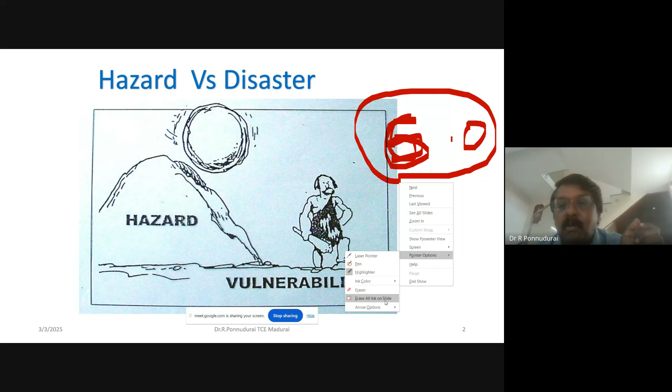In Chennai, it is a very crowded place, but the Rajasthan desert area won't be crowded. So the main difference is we are expected to lose more people at Chennai. So in Chennai, it is called a disaster. In Rajasthan, it is called a hazard. The same earthquake with a magnitude of 6 happening at Chennai and Rajasthan is given two different names. One is hazard and another one is disaster.

So now the Government of India has taken over. Earlier the agriculture ministry was giving relief measures only after a disaster. Now the MHA has taken over. The purpose of MHA in disaster mitigation is concentrating on, number one, mitigation measures, and number two, preparedness. They are pumping a lot of money into preparedness.

Suppose we take the same scenario: the stone is expected to fall from the hill over this person. Now if he is under a shelter, he is not expected to lose his life. These are called mitigation measures. At the same time, somebody can alert him so that he can escape, so his life will be saved. That is called preparedness. Nowadays, the Government of India is spending more money on mitigation and proper preparedness, and so is the case for this STP program.

If you see the relationship, what will the risk be here? Risk is hazard multiplied by vulnerability, minus capacity. Now, suppose we give a number for the falling of the stone from the hill, let us say 10. Only one person is standing here, so the risk will be 10. Now, to minimize the risk to 0, what needs to be done? Anyone can suggest. I want the risk to be zero. What should I do?

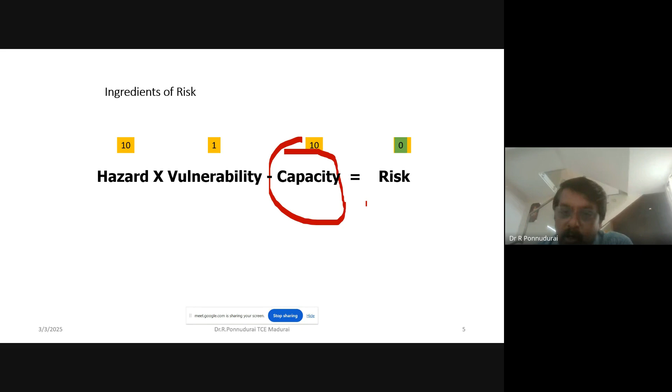Now we are aiming for increasing the capacity so that the risk is made to zero. That is our objective of this workshop.

When we say hazard, as I told, the natural hazard can be a landslide, earthquake, flood, cyclone, tsunami, whatever it may be, but it cannot be prevented. It is a natural phenomenon that is a threat to humans. The vulnerability is exposure to loss of life - more number of people, how many people are expected to lose their life. That's what we refer to as vulnerability here.

And the capacity - how to meet this hazard with available resources like men and material, with the potential resources. That's our capacity. So we need to increase the capacity and reduce the vulnerability, so that the risk can become zero. Our objective is to bring the risk to bare minimum by increasing the capacity or reducing the vulnerability. That is the aim of this particular program.

If you look at this disaster management chart, this is what happens when an incident occurs, maybe earthquake, tsunami, or cyclone. Immediately the government of India tries to spend money on response and rehabilitation measures, giving money for victims and spending on reconstruction and rehabilitation. But after that, the government of India is emphasizing more on prevention, mitigation, and preparedness. That is what we call capacity development.

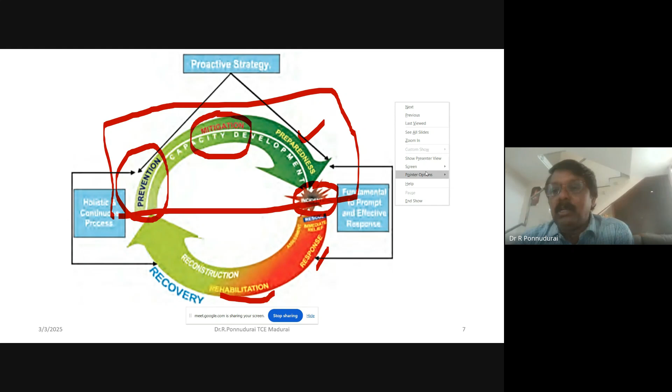More money is spent on mitigation, preparedness, and prevention. That is why we have to create awareness among people so that if preparedness is increased, we can minimize the risk. We can spend more money on mitigation measures like earthquake resistant design, cyclone resistant design, or tsunami resistant design. We have to go for resistant structures, resilient structures, and preventive measures. Guidelines can be given to society and people so that we can minimize the risk. These are all strategies we have to work out to minimize the risk.

If we look at this animation, that is the 2004 tsunami earthquake that happened at Sumatra. The waves which originated at Sumatra reached our seashore after almost 5 hours duration. The waves reached the eastern coast of India just 5 hours after the initiation of the wave propagation. This 5 hours is more than sufficient to vacate the people all along the seashore. But we failed to do it.

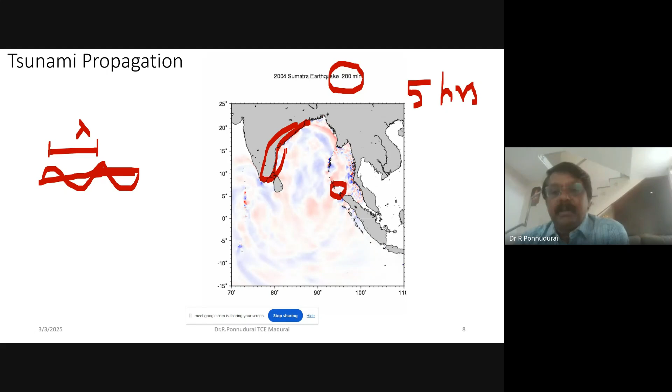Suppose you took a photo of the waves at that particular location - what is the amplitude and frequency of the wave? If you know that amplitude and frequency, it is possible to calculate how far these waves will reach, what intensity the wave is carrying, how much energy is carried, and how far it can reach. Even then, we could not save the people because of the lack of preparedness and awareness. That is why the government of India is spending more on creating awareness. Nowadays we have floating bodies everywhere in the Indian Ocean, which will give indication about the tsunami. That is the importance of preparedness.

The seismic risk directly depends upon the hazard and vulnerability here. If you see this, seismic risk directly depends upon the hazard and vulnerability, or the exposure of the element at risk. So it can be minimized if you reduce the vulnerability. If it is put to a small circle, then the risk will be reduced. In case the vulnerability is reduced, risk is also reduced. We cannot have control over the hazard. That is the objective now.

So we look at this table.

So that's the global occurrence of earthquakes. More than 8 on the Richter scale, almost only one such event is expected to happen throughout the world. Between 7 to 8, almost 18 numbers of earthquakes are expected to happen. Between 6 to 7, it's almost 120.

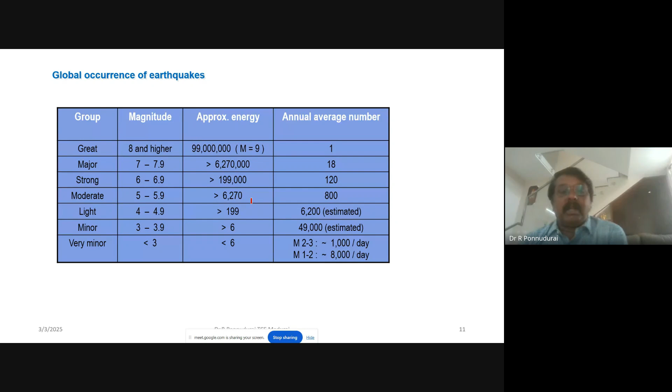We happen to see the energy released during each earthquake, given in this particular column. If you compare, 199,000 divided by 6270 is approximately 30. Same way, 6270 divided by 199 is approximately 30. So increasing one number in the Richter scale results in almost 30 times the damage. The extent of damage will be almost 30 times because the energy release is almost 30 times. So we cannot say it is only a one number increase in the Richter scale magnitude.

So even now, earthquakes are happening, the shaking of the ground is happening. Only thing is we are not able to perceive it when it's less than 3, approximately.

Okay, this one more table. If you look at this table, only one down south of Tamil Nadu we have Coimbatore here, that is 1900, an earthquake with magnitude 6, and reported deaths almost nil. Rest of the areas, if you see, these are all Assam, Kangra, Nepal, Assam again, Anjar, Bihar, Nepal, Uttarkashi, Killari, and Chamoli. That is up to the 2001 record.

So what does it actually indicate? Why are only these northeastern segments of the areas affected by earthquakes? Anyone? Can you give any hints?

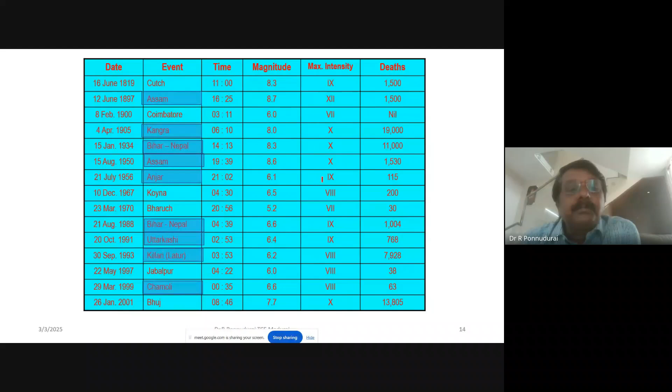So Assam, Bihar, again Assam, Anjar, Nepal, Uttarkashi, Killari - these are all regions of the northeast. Why are earthquakes frequently happening in those regions? Sir, it might be because of tectonic plates movement.

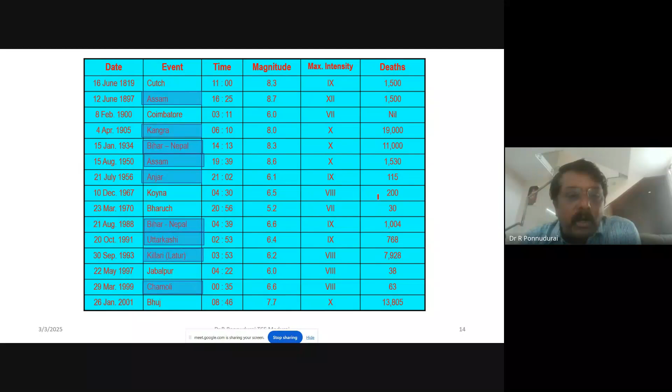Very good, very good. I will let you know about the tectonic plates, what that actually is. Maybe it is correct, actually, because of the tectonic plates - what we understand from that, we will see. Exactly correct. We have two plates, the Indo-Australian plate and the Eurasian plate, that are expected to collide at the Himalayan belt, the northeastern center. It's very correct. So these are all the contents I wanted to discuss with you.

So, number one, what are the causes of earthquake? Before that, suppose you have two water tanks kept at the same level, and the tanks are filled with water.

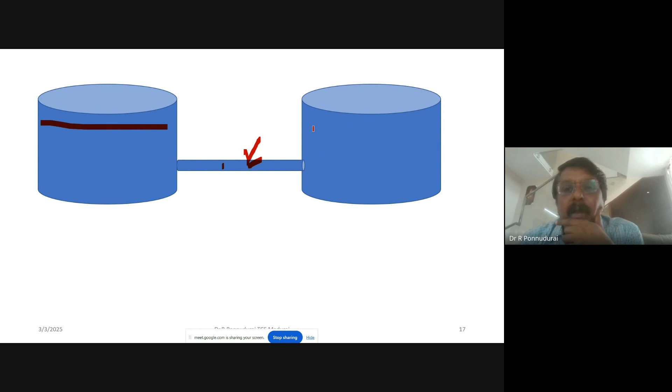Now if I connect a pipeline in between, is there any water flow expected in the pipeline? Both tanks are having filled water - is there any flow of water in the pipeline? Because if the water is filled in both tanks, will there be any flow of water? No, there won't be any flow, sir.

So if the same water tanks are kept at different levels, now the water flows from the higher level to the lower level. Do you agree or not? Yes, sir. So the flow of water took place because of the difference in head.

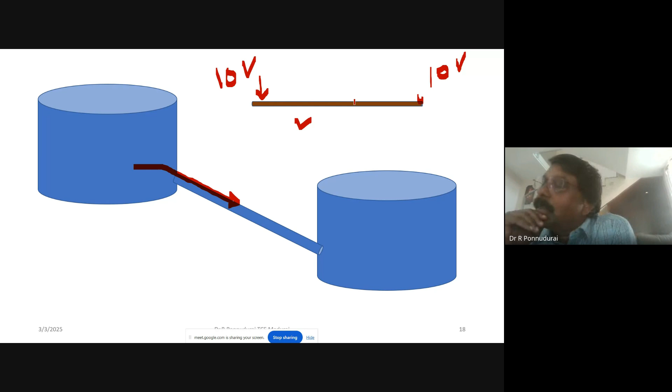Same if you take a piece of wire - if I give a potential here, 10 volts, suppose, and 10 volts here, and here also 10 volts, will there be any flow of current in the wire? No, sir, it will remain the same because the potential difference is 0 - 10 minus 10 is 0. Suppose instead of 10, if I go for 100 now - 100 minus 10 - now the potential difference will be 90. So current is expected to flow in the piece of wire. Is it clear? So when the voltage increases, potential difference increases, current flow takes place.

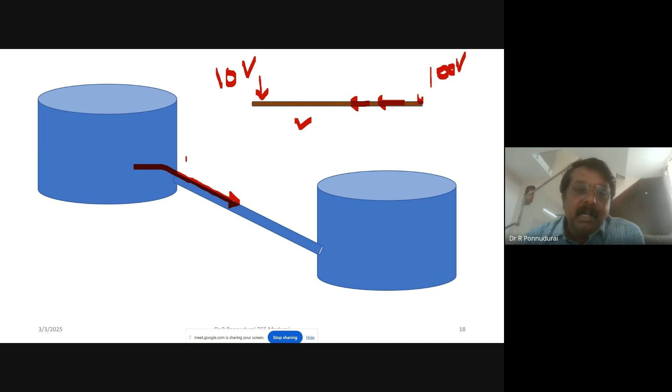Same way here, when the head increases, the water flows. Similarly, during the formation of earth, what happened is the high density particles got deposited at the core - that is what we call the core. High density particles got deposited at the core, while lightweight particles rose to the surface - that we call the crust.

Now, if you compare the pressure, temperature, and density between the core and the crust, the pressure will be maximum at the core. Will you agree with me? Temperature also will be maximum at the core, and density also will be maximum. Here at the crust, it will be less.

Because of the difference in pressure, temperature, and density between the core and crust, there is a formation of current which flows in the mantle region. That current makes the mantle move. So that means the mantle is semi-solid in nature and keeps on moving.

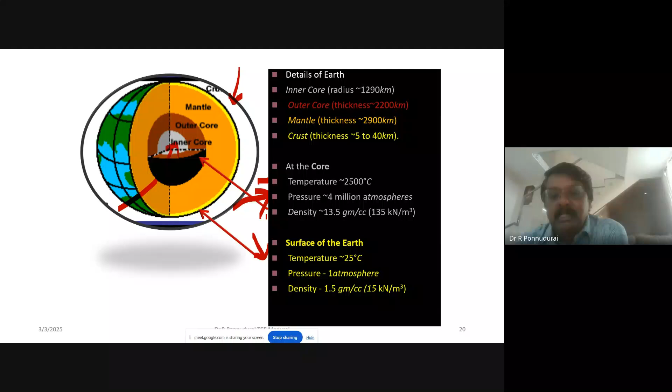So we have the core and the crust. At the core, the temperature is 2500 degrees centigrade, but at the surface it is only 25 degrees centigrade, maximum 40 degrees centigrade. Same way, the pressure at the core will be almost 4 million atmospheres, but at the surface it is only 1 atmosphere, 1 kg per centimeter square. Same with density, it is going to be 13.5 gram per cc at the core, here it is only 1.5 gram per cc.

So because of the difference in temperature, pressure, and density between the core and crust, there forms a current. This is what we call a convection current. The convection current makes the mantle move, so the mantle keeps on moving. It is like an egg, we can visualize it like an egg.

So the inner core is the yellow portion, and this white portion is the mantle, suppose let us assume that. This is what we say is the shell, we can resemble it to the crust. Likewise, the skull is made up of a number of patches, like our human skull, it is like patches.

Same way, the earth also has 7 major plates which are floating over the mantle material. So when the plates are floating in the mantle, it is expected to make a collision. The plates are moving because the mantle is moving. The mantle is moving because the current is developed, which is due to the differential temperature, pressure, and density differences between the core and crust.

Is it okay now? How come the plates are moving? The plates are moving because the mantle underneath the plate is also moving. The mantle is moving because of the current developed, which is due to the differential temperature, pressure, and density between the core and crust.

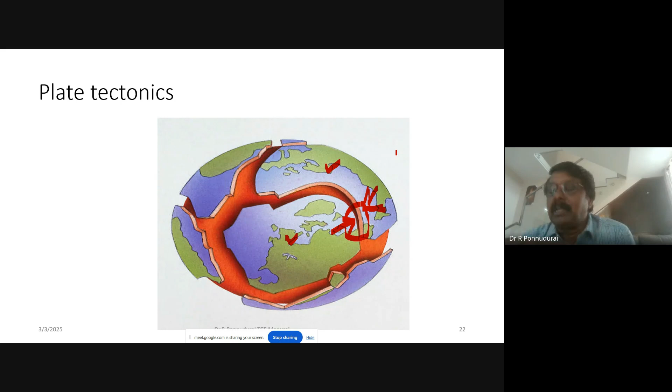That's what we say is plate tectonics. So these are the plates: Eurasian plate, Indo-Australian plate, Pacific plate, North American plate, South American plate, and African plate. If you happen to see this portion, this is our India. So India is in the Indo-Australian plate.

What happened is the Indo-Australian plate and the Eurasian plate are expected to collide at this particular region, and that is why the formation of Himalaya. So the Indo-Australian plate and the Eurasian plate moved one over another, and that resulted in the creation of the Himalaya. The Himalaya formation took place because of the movement of these two plates.

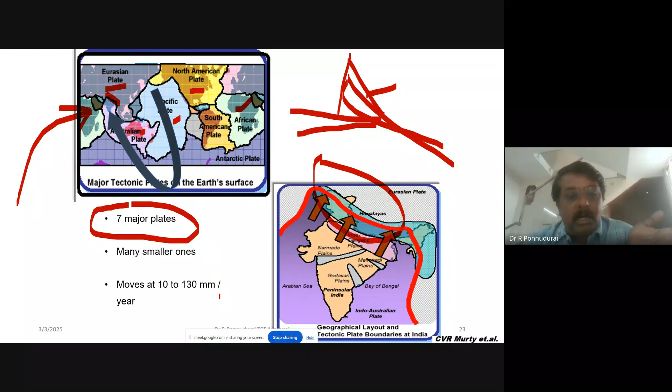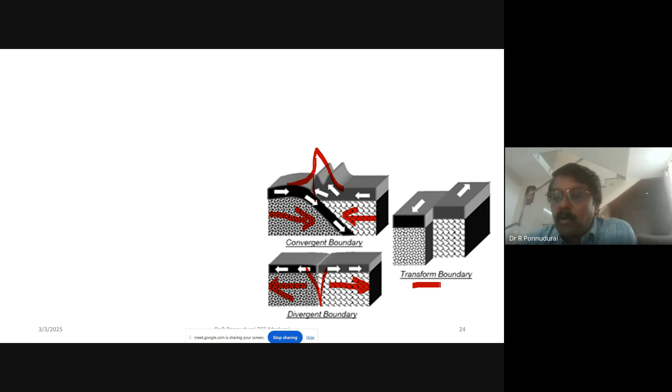So this is what happens actually. When the plates are moving close to each other, we call it a convergent boundary, so hill formation is expected to develop. When the plates are moving away from each other, that is called a divergent boundary, so here we are expected to develop a valley formation. Okay? And this is called the transform boundary, a shearing action. So these plates are expected to move only under these three conditions.

Okay? So this is the number one reason, that is plate tectonic theory. Number two, any disturbance happening underneath the earth crust is also possible. That is one more reason. Suppose you have a number of layers of rock: we have the granite, here limestone. Likewise, we have a number of layers of rock, and each layer of rock will have a different elastic modulus. Suppose you have a building constructed over this particular region; it is very confined.

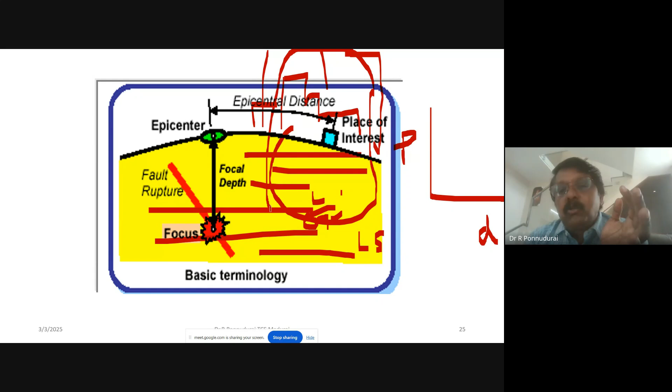In this case, if you plot the load versus deformation graph, this is the entire load. Suppose this is weak rock, that is the limestone, and these are granite, heavy weight particles. We plot the load P on the y-axis, and the elastic modulus of this particular rock layer, the limestone, is very less. So in this case it is going to be vulnerable, and this limestone rock is expected to get broken.

In that case, all along the fault it is going to slide, that movement of that particular rock layer. Suppose the rupture of rock takes place: underneath the earth crust, at a weaker portion, the point where the rupture of rock takes place is called the focus point. Now if you plot P versus delta up to the rupture of rock, before rupture the plates are expected to move, that is delta. So the area under the graph multiplied by the volume of the material just above the focus point will give the amount of energy released during earthquake.

The amount of energy released during earthquake is the area under the graph multiplied by the volume of the material just above the focus point. That much energy is expected to be released at the focus point, and on release, waves are created. Any vibration underneath the earth crust causes wave propagation, the initiation of a wave. Those waves we call body waves, that is the primary wave and the secondary wave.

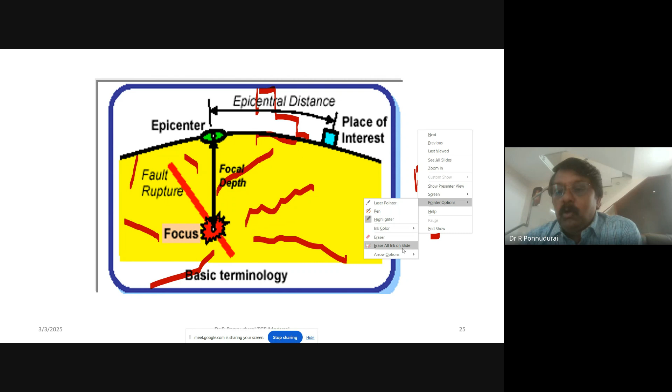When the waves reach the crust at the surface and propagate underneath the structure, they make the structures move in to and fro motion and up and down motion. That's where the problem comes. So this is the second reason: any rupture underneath the earth crust is also a reason for the earthquake. Number one is plate tectonics, number two is any disturbance underneath the earth crust. The rupture takes place at the point we call the focus, and where the waves come out at the surface just above the focus point, that point we call the epicenter.

Is it clear now? So far we discussed only two things. Number one is causes of earthquake, and there are two reasons: number one is movement of the tectonic plates, number two is rupture of rock underneath the earth crust. When the rupture of rock takes place, the waves are initiated. Any vibration in a solid medium induces a wave. When the waves come out of the surface at the epicenter, the surface waves are generated.

Okay, these waves which are originated at a focus point we call the body waves. Body waves, that is primary wave and secondary wave. So when the primary wave and the secondary wave propagate underneath your structure, it's not expected to damage the structure fully. But when the primary wave comes out of the surface at the epicenter, it makes the structures move in a to and fro motion, up and down motion. That wave we call a surface wave. The surface waves are more dangerous than body waves.

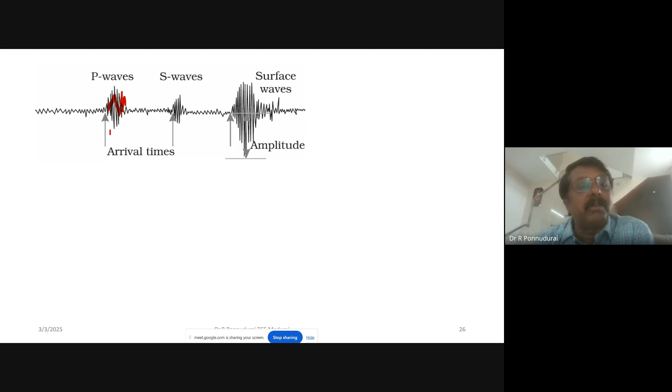Okay. So this is what happens in the seismograph when the waves are arriving. The first disturbance we can witness in the seismograph indicates arrival of P waves. The second disturbance indicates arrival of S waves. So from that it is possible to calculate the magnitude of earthquake. You will see that. So this is the focus point where the rupture took place. This is what we mean by the delta here.

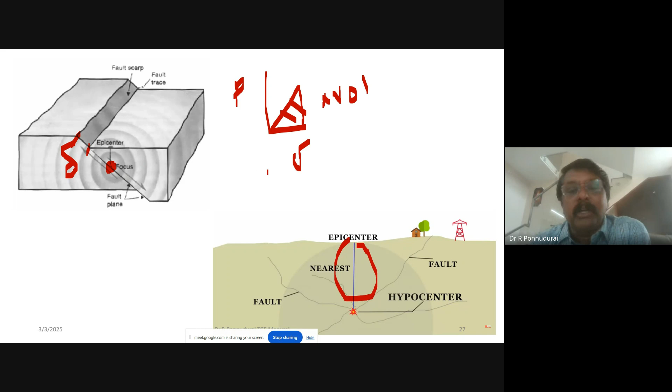So when we plot the graph of P versus delta, the area under the curve multiplied by volume of the material just above the focus point will give the amount of energy released during earthquake. That energy we express as a number like the Richter scale magnitude. So we can visualize the delta and the surface also. It is not every time you can see that.

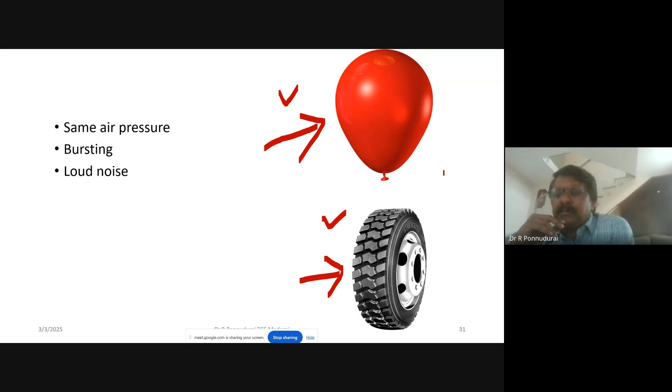So if you happen to see these two objects, here we have the balloon, here we have the lorry tire. We are filling the balloon with some amount of air pressure. The same amount of air pressure is filled in the lorry tire also. So when the bursting takes place, which is expected to make a louder noise? Can anyone suggest? Both are filled with the same amount of air pressure, the balloon and the lorry tire. Tire, obviously. Tire. Why? Why tire?

It can hold more pressure than the balloon. Okay. It can hold more pressure. But here my condition is I am applying an equal amount of air pressure. Then it will be, sir, balloon only. But obviously we could hear louder noise when the bursting of the lorry tire takes place, isn't it? But the balloon can't hold the same pressure as the tire. So in this case, first the balloon will burst rather than the tire, because the tire has thick walls which can hold more than the balloon. Okay. So another interpretation.

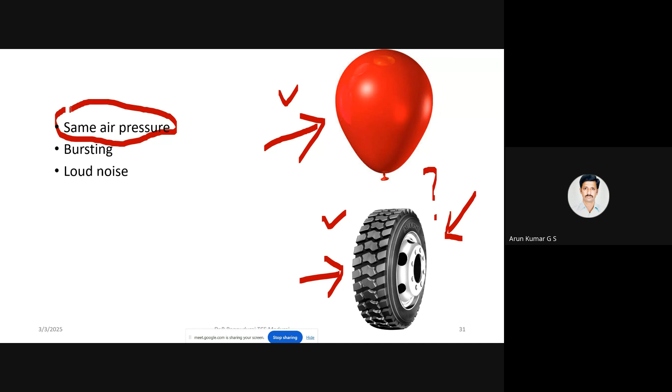So here we can plot the graph of load versus deformation for both the balloon and the tire. If we plot it, it will be like this for the balloon; it is going to deform more. In the same graph, in case of tire, it will be like this. If we calculate the area under the curve for both cases, multiplied by volume of the material, that is the balloon here and the lorry tire here, which will have more energy?

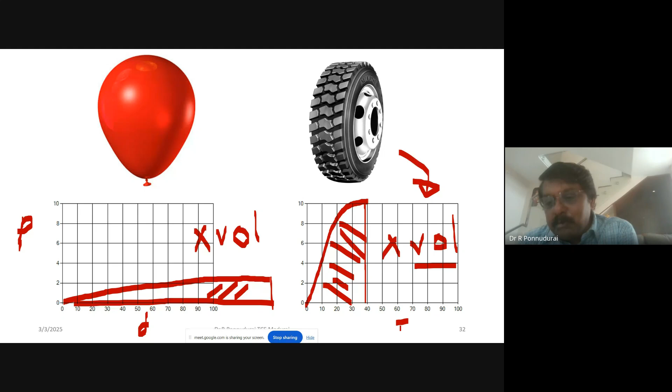Area under the curve multiplied by volume of the balloon. Volume of the balloon means the thickness multiplied by surface area. The same way here, the volume will be more for the tire. The area under the curve may be less or more than that of the balloon, but the volume is going to be more. So that means the energy absorbed in the tire will be more than that of the balloon. Do you agree or not?

The amount of energy absorbed is going to be released in the form of sound energy. So that is why the tire makes louder noise when it bursts. Is it clear? Yes, sir. Same way, in case the rupture of rock takes place underneath the earth crust, somewhere here, this much energy is expected to be released. If you plot load versus deformation, the area under the graph multiplied by volume of the material just above the focus point is going to be released. That amount of energy we call the Richter magnitude of earthquake.

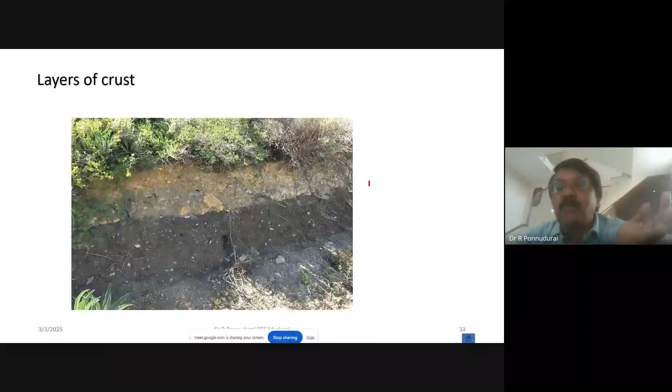Number one is movement of the tectonic plates. Number two is any disturbance that happens underneath the earth's crust. So this is a brief introduction to the cause of earthquakes. When the earthquake happens, these waves are created. These waves we call primary waves, originated at the focus point.

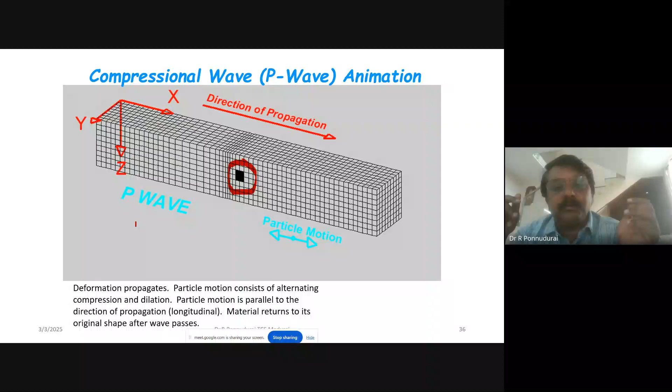So this is the primary wave. Look at the black dot. This is what happens in the soil: it is getting compressed and elongated. If you look at the soil sample at a particular location, the soil is expected to get compressed and elongated. This is what is going to happen in the building also. So this is regarding the primary waves.

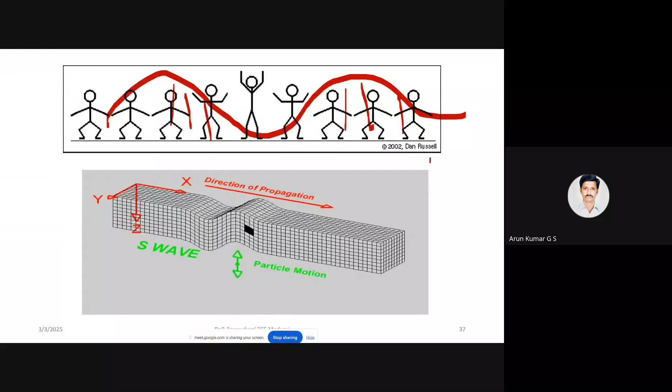Okay. Can you see now? Yes, sir. Okay. So which wave is this one? Is it a primary wave or S wave? Yes, right, sir. S wave.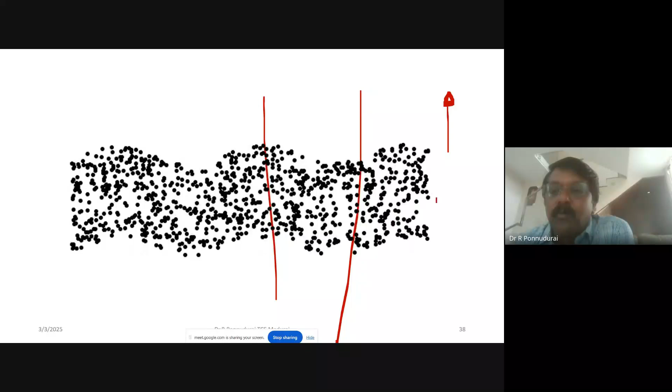If you draw a line here, each and every particle will be vibrating in its own plane. It is not going to divert from its original plane. If you take any line, all the particles are vibrating in the same plane. That's the main phenomenon of the S wave. When the S wave propagates, each particle vibrates in the vertical plane, so our building is expected to move up and down. When the building goes upward, there is no problem because we have given a factor of safety, so the building is safe in up and down motion. But when the building is moving in to-and-fro motion, that's where the problem comes.

Just imagine the S wave propagation in the soil sample. One diagonal is getting increased, the other diagonal is getting compressed. That is shear wave propagation. Now both the primary wave and the secondary wave originate at the focus point. The primary wave travels faster than the secondary wave. When both waves come out to the surface at the epicenter, surface waves are generated, and when they propagate underneath the structure they cause the problem. So these are the surface waves.

We call it a Rayleigh wave. Just look at the dot. It is moving in an elliptical fashion. Your building is also going to move in an elliptical fashion when the surface waves are propagating. This is the problem. When it is moving up and down, there won't be much problem. When the building is expected to move like sea waves, in an elliptical fashion, there the problem comes. That is why the surface waves are more dangerous. That happens only at the epicenter. At the epicenter, when the waves are initiated, the surface waves are generated.

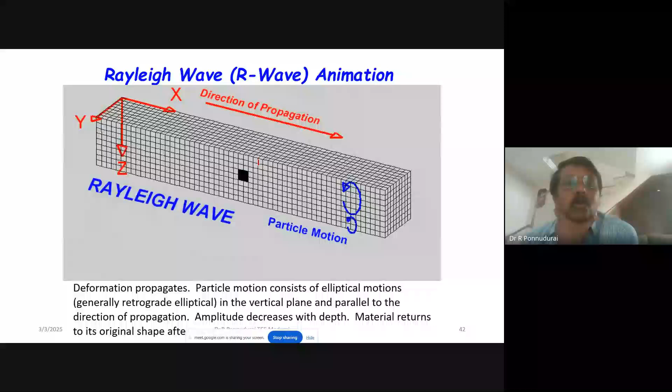These surface waves are, number one, the Rayleigh waves, and number two, the Love waves. Both waves are expected to originate at the epicenter. The Love wave is nothing but the S wave, but in the original plane. It is like a snake movement. These Love waves and Rayleigh waves are more dangerous than the primary waves and the secondary waves. So we should be able to tackle these Love waves and Rayleigh waves to safeguard the structure. Okay.

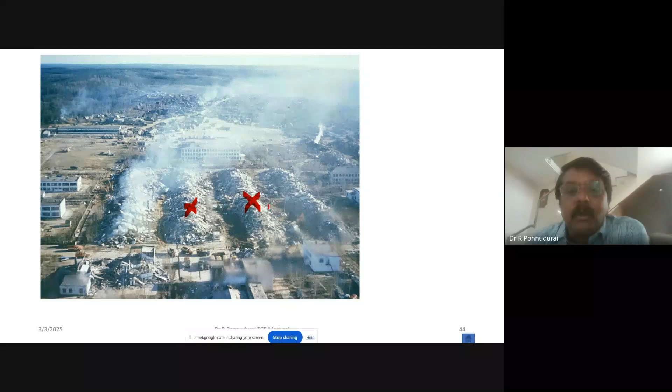Now look at this picture. These are all the buildings completely collapsed, but these buildings are okay. This building is also okay. So what may be the reason? It is in the same soil. Why are these buildings okay? Why did these buildings collapse?

So suppose this is our map here. We are at Chennai. Some epicenter is available, let us take between Chennai and Coimbatore. So this is the epicenter. This is the location of the building. If you orient the building in this direction, the building will be safe. If you orient the building in this way, it is going to be dangerous. Why?

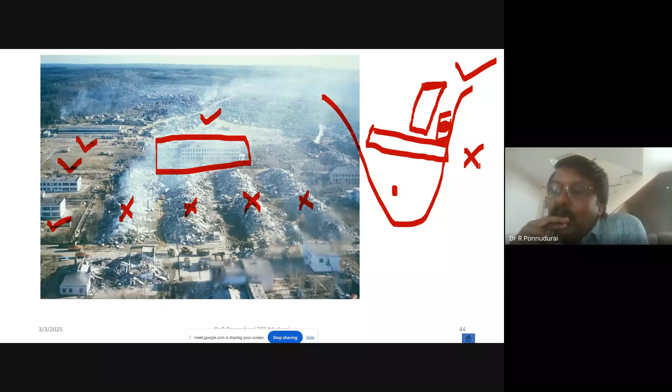So this is the epicenter location. You orient the building in this direction, it's okay. When we orient the building in this direction, perpendicular to the wave propagation, it is going to be very dangerous. Why? Suppose you look at this rectangle: this is D, this will be B. So the moment of inertia of this portion will be B D cube divided by 12. The D will be parallel to the wave propagation. So wherever the force and the dimension are parallel, that will be D in the moment of inertia.

If we calculate the moment of inertia for this rectangular building, and the same way for this building, this will become D and this will become B. So the moment of inertia will be less here, and here the moment of inertia will be more. Moment of inertia is directly proportional to K, that is the stiffness of the building. So here the stiffness K is more, and here K is less.

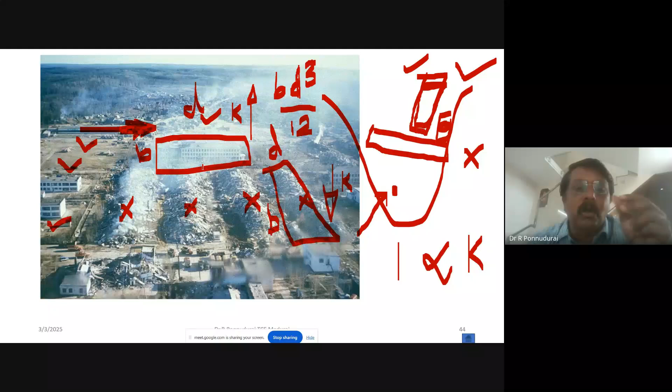Is it clear now? That means you have to orient the building in the direction of the wave propagation. For that you have to look at where the epicenter is and where you are going to construct your building. If both points are known to you, you can orient the building in this direction. That is the number one point. So we can safeguard the building from earthquake collapse. So the orientation of the building matters.

These are all the same type of building, but these buildings are safe because of this orientation. The wave propagation had taken place in this direction. Is it clear now? Shall I go to the next point?

Okay. Yes, sir. Now, so far we have seen the causes, the waves and the orientation of the building. Measurement of earthquake, I will not get into the details. There are two measurements: one is a quantitative measurement, and another one is a qualitative measurement. That we call magnitude; here we call it intensity.

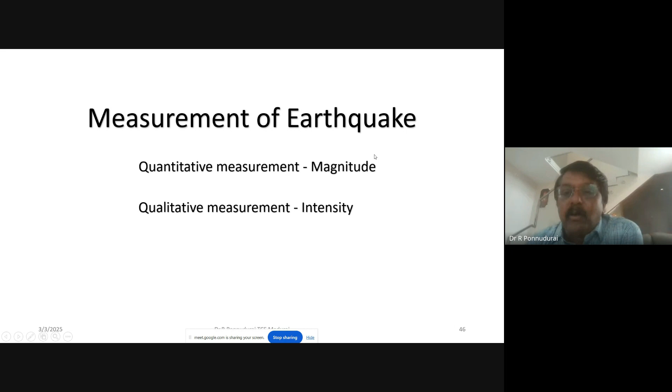In the case of a cube, if we see M30 grade of concrete, that indicates 30 Newton per mm square. That we say is in quantity, magnitude. If we say in quality, it is a good concrete, a poor concrete, moderate concrete. That's why we call it a qualitative measurement. Same with earthquakes, we say it in numbers because it's the magnitude. Energy released during an earthquake is termed in the form of a number, so we say it's magnitude.

If we measure the earthquake by merely observing the extent of damage, that we call intensity: good, bad, or worst merely based on observation. Suppose there is a huge crack in the wall, a huge crack in the beam, a huge crack in the column. Merely based on observation, if we classify the earthquake, we say it's intensity. Magnitude can be calculated using the Richter scale, that is by using a seismogram. We will see how earthquakes are expected to.

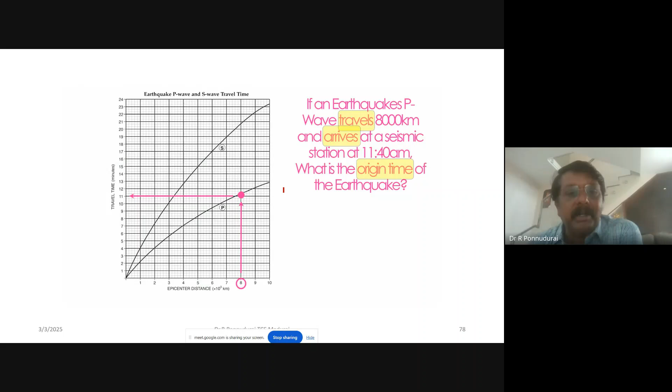Actually, I want to discuss so many things, but the time is not there. Go fast.

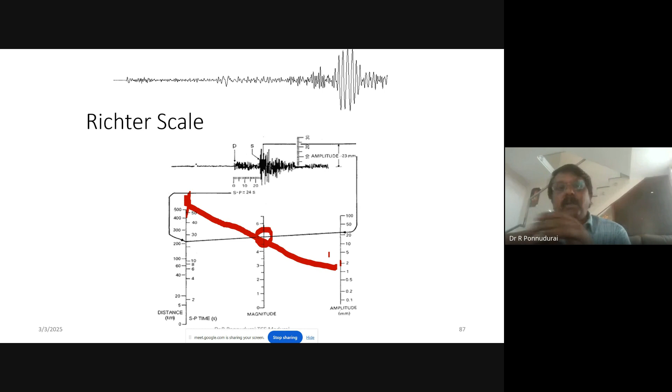Suppose you are measuring the same earthquake from Japan, what happens? The S-P time difference will be somewhere here, and the amplitude of the secondary wave will be somewhere here, but the magnitude is not going to change. It is going to pass the same magnitude, 5. That is why the Richter scale magnitude is universally accepted. Is it clear now? The number indicates the amount of energy released during the earthquake.

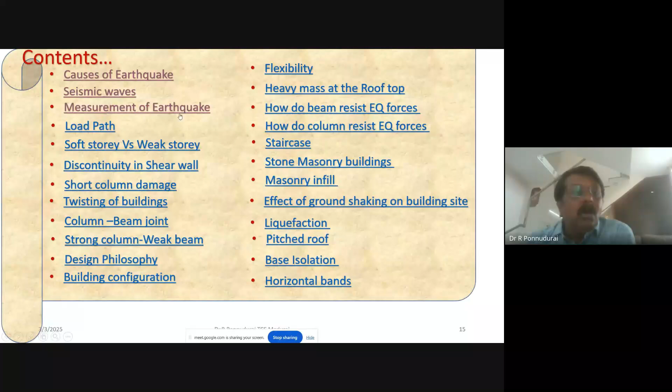Now the important topic: load path. We know that in a building, the load is transferred through the elements of the building, that is, from slab to beam, beam to column, column to the foundation, foundation to soil. So in case this is the building, from the slab it goes to the beam, from beam to the column, from column to the foundation, and from foundation to the soil. That is the load path we conventionally design for.

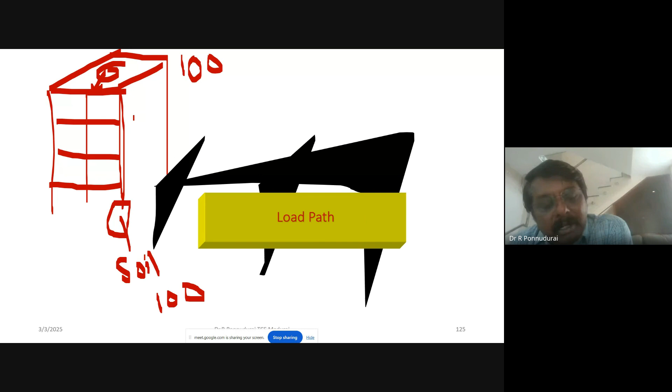So whatever loads are available, let us take 100 units of load at the top. The soil also will have to have the same 100 units of load. The load transfer should happen. No element in the building, whether it is a beam, a slab or a column, should hold the load; it should transfer the load to the other element. So from slab to beam, beam to column, column to the foundation, foundation to the soil. Our design should ensure that whatever external loads are available are transferred to the soil without any dissipation. That is the objective of the design.

But here a problem comes. What is the problem? We will see that. In the case of load path, let us imagine. When the wave propagates under the structure, the building is expected to move in up and down motion and to and fro motion also. Both ways are possible.

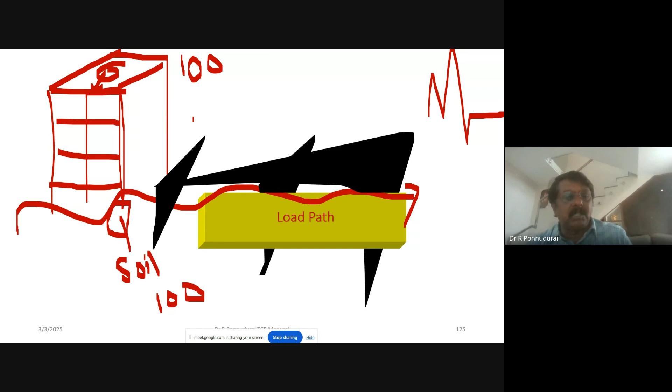When it moves up and down, damage occurs, but it's not going to be very much damage. But when the buildings move in to and fro motion, we are going to have a force called inertia force, which is expected to act.

So let us imagine there is a building here. When the wave propagates under the structure, your foundation, which is connected to the soil, also goes in the direction of the wave, but your upper storey is not going to cooperate with your foundation. It is going to experience a force in the opposite direction. Let us assume that I am standing in the bus.

Okay, so all of a sudden the driver starts the bus. My feet, which are touching the floor of the bus, go along with the bus, but my upper body is going to experience a force in the opposite direction. This is what happens when the bus moves in the forward direction. I am standing in the bus, and my upper body experiences a force in the opposite direction. That force depends upon the mass of my body and the acceleration of the bus. So this force, mass multiplied by acceleration, is a force which pushes me backward.

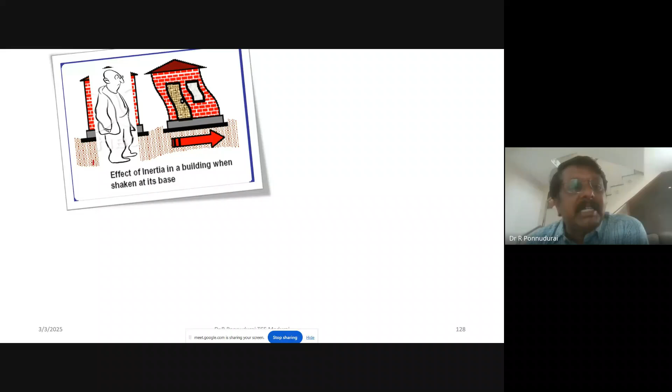Now just replace me with the building. I am standing in the bus, my feet touching the floor go along with the bus, but my upper body experiences a force in the opposite direction. That force will be mass times acceleration. If I have more mass at the upper body, I receive more force; if less mass, I receive less force. The same thing happens in the building also - that force pushes the building in the opposite direction.

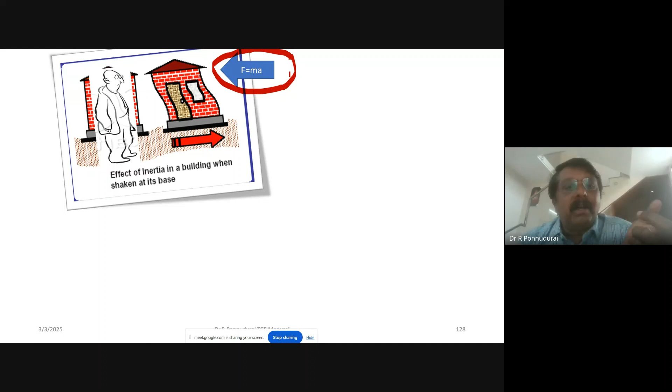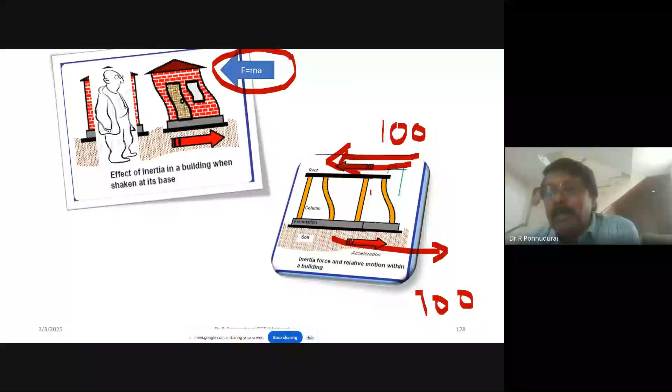Not only that, the force available at the roof level cannot be transferred to the soil without any dissipation. Suppose the same 100 units of force available at the roof level cannot reach the soil as 100 units - unlike in the case of live load and dead load. That is the main reason for the collapse of buildings. Whatever force is generated at the roof level has to be transferred to the soil without any dissipation. So we will see what potential deficiencies exist in our buildings.

Number one: we don't consider the information regarding the inertia force in our design.

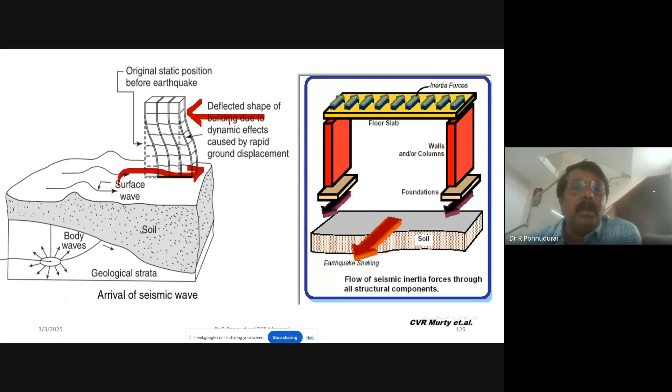So this is what happens when ground waves propagate under the structure - the foundation moves, but the upper story experiences a force in the opposite direction. That force is not being able to transfer to the soil. So this is a force - say 100 units of force at the roof level - that is the inertia force. The frictional forces should be such that the same amount, 100 units of force, should be available here. So here it's 50, here it should be 50. In such cases, it is possible to transfer the load - you have to just account for these frictional forces, which should be equal to the developed force. Then it is possible.

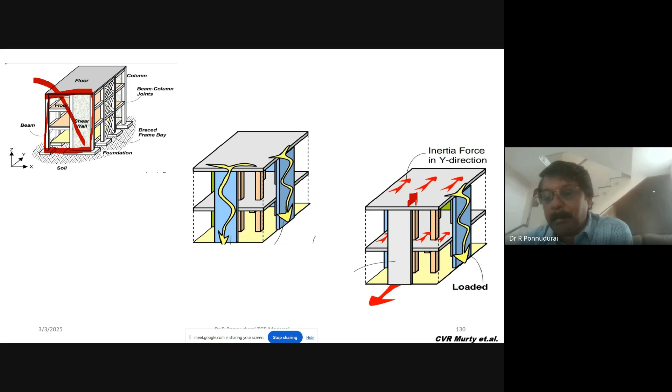This force can also be transferred through a shear wall - we can provide an RC wall. Via this wall, it is possible to transfer the external force. So both ways it is possible to transfer the horizontal force. These are the provisions: number one is the moment resisting frame, ordinary moment resisting frame; this is the braced frame bay, that is with the shear wall. With these provisions, it is possible to transfer the horizontal force.

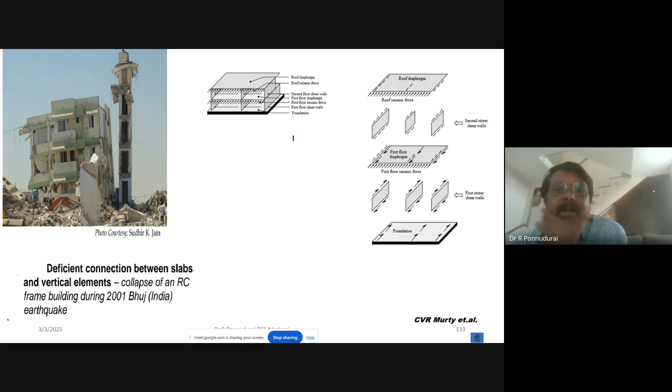So the transfer load path is very important. Whatever force is expected to generate at the roof level has to be transferred to the soil without any dissipation. If you are able to do this, the building will be safe.

That is what regarding the load path. Now let's look at soft story and weak story failures in earthquake-resistant buildings. This is our conventional building in urban areas - we have car parking at the ground floor, so we construct the building with an open story at the ground floor for our convenience. When we have such a building, earthquake forces are expected to act at each and every floor, acting horizontally. It is like a cantilever beam, an inverted cantilever beam, with a number of point loads.

So if you draw a shear force diagram for this beam, suppose let us take 2, 3, 5. How can you draw the shear force diagram? It will be 2, so it will be 5, it will be 5 plus 5, 10. So this is what the shear force diagram looks like for this cantilever beam.

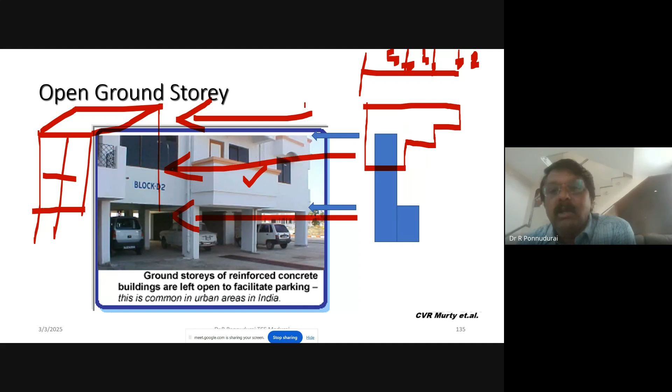So here also this is a case of inverted cantilever. The building is fixed at the bottom here. The forces are expected to act horizontally, so the building behaves like an inverted cantilever. The shear is expected to get accumulated at the bottom. More shear accumulation is expected to happen at the bottom.

But we don't have any shear resistance at the bottom. More shear is expected to develop at the ground floor, but there is no resistance to shear at the bottom. That is why the building is expected to get sheared off at the ground floor, and the building will be falling down. So we should avoid the open ground story.

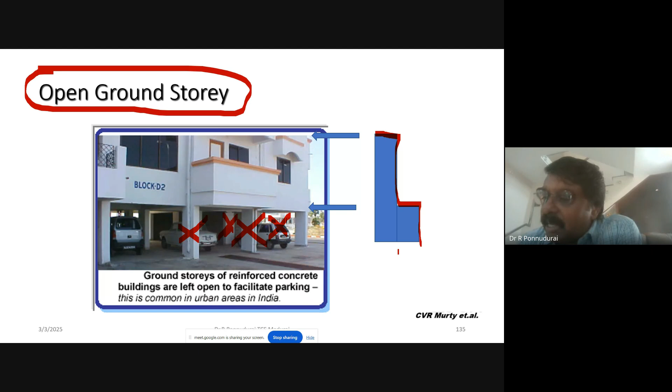So before that, what is that actual shear force here? Can anyone say what the shear force would be? What is that shear which is expected to damage the ground floor? What is it actually, shear? So suppose if you look at the broomstick, okay.

I am cutting the broomstick with scissors. I'm giving a condition: you have to apply equal and opposite forces. Here also 5 Newton, here also 5 Newton. Now is it possible to cut this broomstick? Yes or no? Yes.

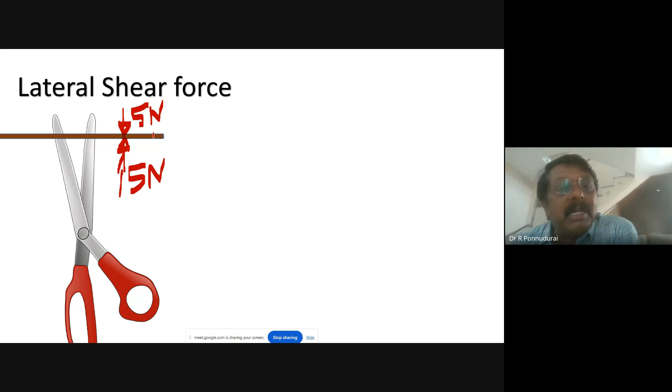Can you hear me? Yes sir. Okay, now it is not possible to cut the broomstick because the forces are equal and opposite. But by virtue of the geometry of the scissor, it has been purposely designed in such a way that it produces unequal forces, like 15 Newton from the bottom, 5 Newton from the top. Now the resultant force is 10 Newton.

The 10 Newton is nothing but a shear force. Is it clear now? That unbalanced force at a section, we call it shear force. That shear is expected to accumulate at the bottom of your building. This much is shear, an unbalanced force, that is expected to shear off your ground floor column.

So what should you do now? We know how much shear is expected to develop. So we have to increase the shear strength at the ground floor. Then it is possible to safeguard your building. Is it clear now?

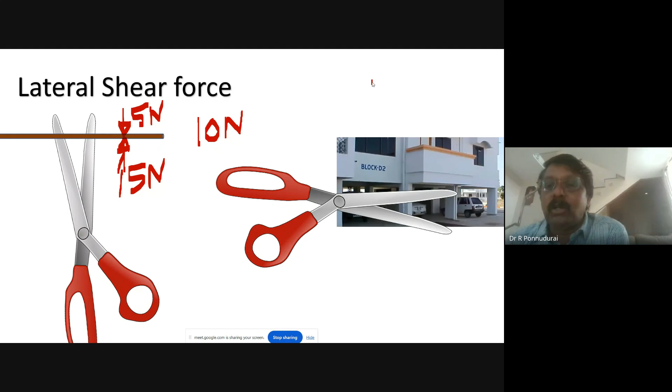So that 10 Newton force here, same with the accumulation of shear, which is more at the bottom. So the shear is expected to shear off your ground floor column, and the building is expected to come down. So don't go for any open ground story in earthquake-prone areas. It is always suggested that the strength and stiffness of the ground floor should be more.

The shear is expected to be more at the ground floor, so that is why maximum damage happens only at the ground floor. Is it clear now? So suppose if you have strength and stiffness uniformly distributed all over the building, then there won't be any problem.

So this is what the story demands, shear story, but the capacity should be more than that of the story shear developed. That is what capacity enhancement means. So your shear strength should be more than the shear developed. That is the idea here.

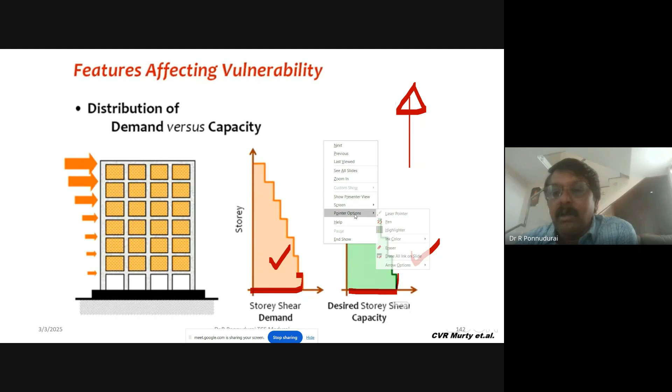See, these buildings are expected to collapse because there is no shear resistance at all at the ground floor. We are given an opening at the ground floor, and there is no resistance to shear there. Stiffness is absent compared to the rest of the floors. This stiffness irregularity causes what we call soft story failure.

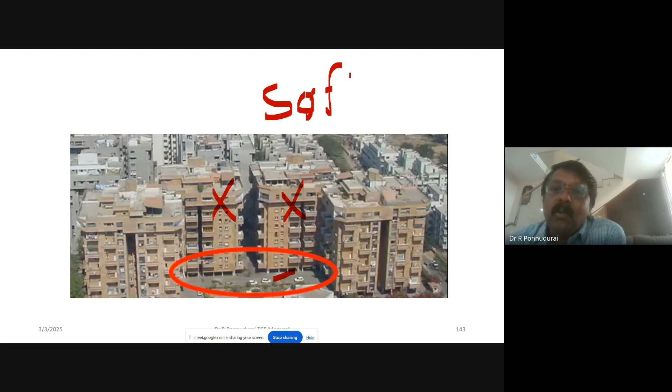Stiffness irregularity between the buildings should not be more than 20%. Stiffness irregularity should be avoided - that failure we call soft story failure. In case you have lack of strength between the floors, that failure we call weak story failure. So this building should be avoided.

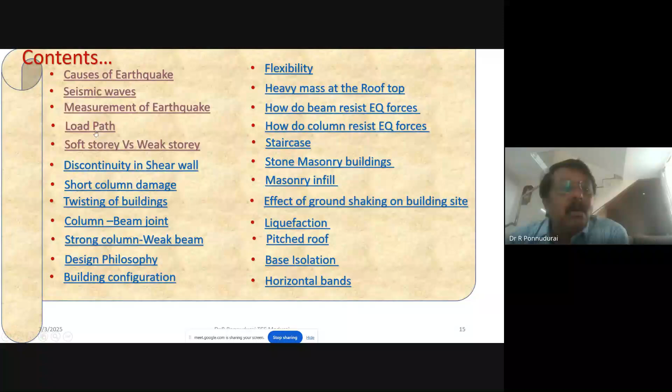So always the failure is expected at the ground floor. Is it clear now? So we know about soft story and weak story. Irregularity in stiffness all along the height of the building is called soft story. Irregularity in strength all along the height of the building is called weak story failure.

Next, discontinuity in shear wall. We suggest that the shear wall should be provided to transfer the horizontal forces developed at the roof level to the soil. But sometimes it happens that we use the shear wall only at the upper stories, with no shear wall at the ground story and first story. That is very dangerous. So if you provide a shear wall, provide it from top to bottom of the building, up to ground level.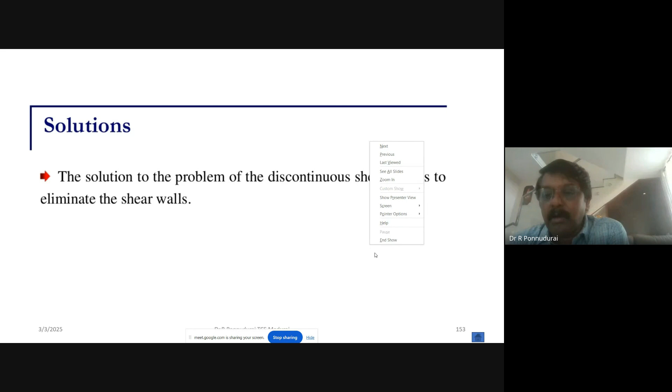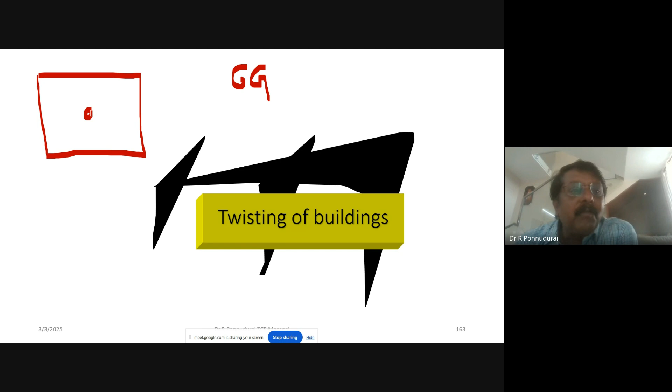Now next, twisting of the building. If you see a symmetrical or rectangular building, we have a point called the center of gravity, CG, considered the center of the building. We have another point called the center of rigidity. Center of gravity is a point where the entire mass is expected to concentrate. Center of rigidity is a point where the entire stiffness of the structure is expected to concentrate.

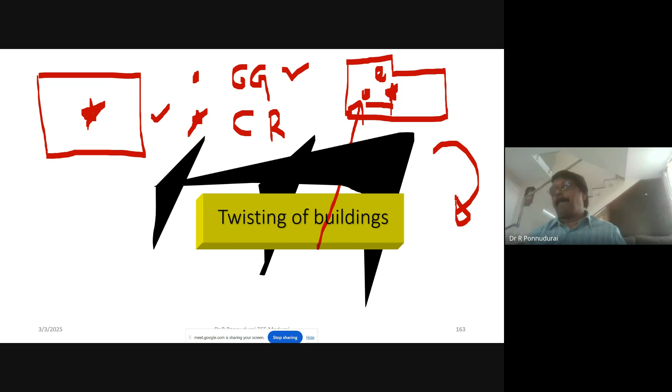If the center of gravity and the center of stiffness are both at a single point, the building will be safe. If you take an unsymmetrical building, where the center of gravity is here and the center of rigidity is somewhere else, the earthquake force acting at the center of gravity, multiplied by the eccentricity between these two points, will rotate the building in the clockwise direction. There will be twisting in the building because the center of gravity and center of rigidity are not at a single place. There is eccentricity between these two points.

Between these two points there is a distance called eccentricity, which is the reason for the rotation, the twisting, of the building. So we have to make sure that the center of gravity and the center of rigidity are at a single place in any building, symmetrical or unsymmetrical. For that, we move the center of rigidity towards the center of gravity by closing the opening at one location, or giving an opening at the other end, so we can move the center of rigidity towards the center of gravity. By doing that, we can avoid the rotation, the twisting, of the building.

Is it clear now? For example, suppose there is a swing with a child sitting on it, the length of the rope same in both cases. If the child sits at the center of the swing, there is no problem - the center of gravity of the child and the center of rigidity of the swing are both at a single place, so the child is not expected to fall. When the child sits at the edge of the swing, with the center of rigidity still at the center, there is eccentricity between these two points, which causes rotation. That is why the child falls. Is it okay?

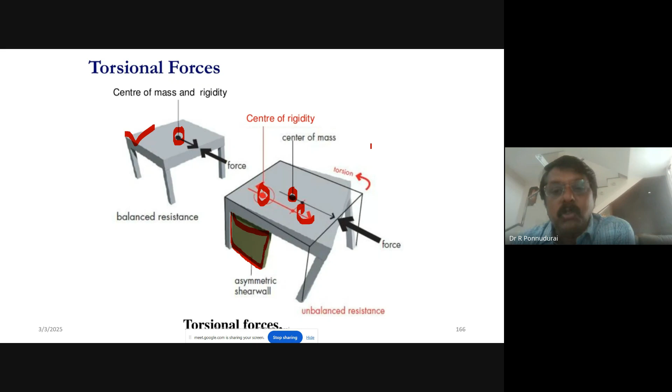So this concept is being used in earthquake resistant buildings also. You have to make sure that the center of gravity and the center of rigidity of a building are at a single point. Otherwise the building is expected to collapse.

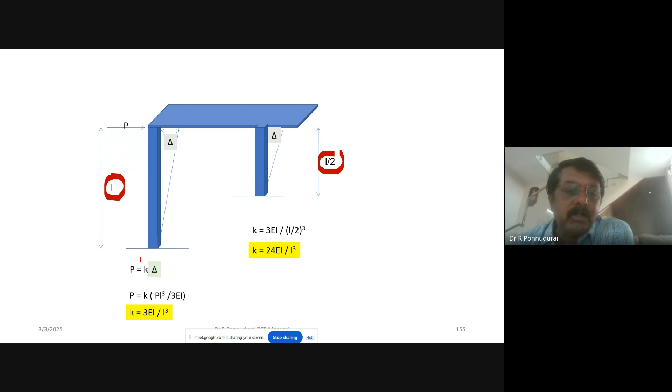So we will see next the short column damage. What is short column damage? In the sloping terrain, the building will have different lengths of column. If you compare two columns, one having length L and another L by 2, on sloping terrain: when the earthquake forces act at each floor level, each column is expected to deflect by delta, and delta remains the same in both columns. It is like a cantilever beam with a point load at the free end.

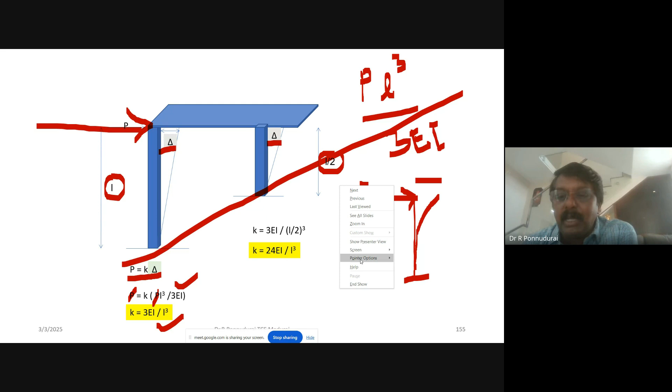So what will the delta be now? It is P, so PL cube by 3EI will be the delta. Now in this case, P is equal to K delta. So P cancels, and K will be equal to 3EI by L cube. That is the stiffness of this column. If we substitute L equal to L by 2, the column K will be 24EI by L cube.

So the stiffness requirement for this column for the same force is almost 8 times, since 24 by 3 is 8. So we need to increase the stiffness of the short column; the moment of inertia of the short column should be more. But normally on sloping terrain, we have the same size of column everywhere, so we don't change the size of the column. In the case of a short column, we have to alter the size.

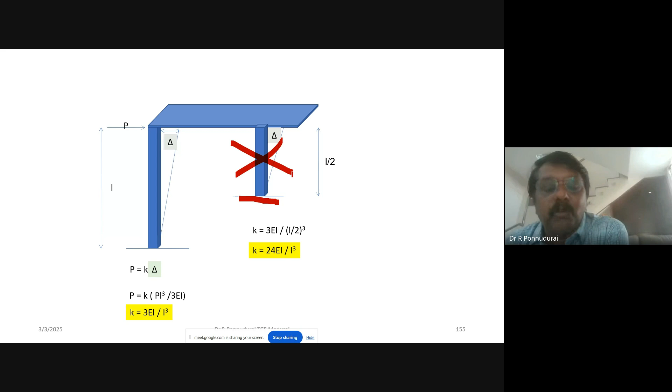So we have to increase the moment of inertia of the short column, almost until the K becomes equal. So in such cases, it is possible to safeguard the building in case of sloping terrain. If we are not increasing the moment of inertia, this column is expected to fail during earthquake. Short column is expected to get crushed. So that's what happens here.

This short column will fail because it demands more stiffness, but the column size is not sufficient. So increase the column size so that stiffness will get increased. And the provision of the mezzanine floor in a building is also very dangerous. This portion is suspected to act like a short column. So that is also very dangerous. Short column attracts more amount of earthquake forces.

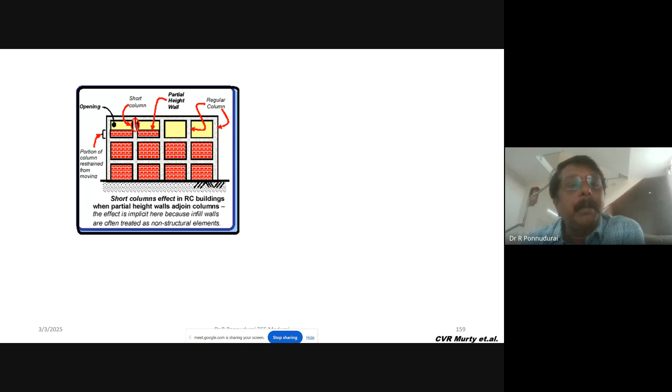So what is the solution now? This partial infill wall also is more dangerous. It is acting like a short column now. How? So this is the short column, and this is a long column now, when the forces are acting in this direction. So this length L, this L by 2.

Let us imagine that. So the column stiffness demands almost 24 EI by L cube. Here only 3 EI by L cube. So almost 8 times more should be there. But here, because of the opening, the stiffness is less by 8 times. So this column is expected to get damaged. That's what we witness here.

So it is acting like a short column here. It is fixed at this point. The length will be L by 2, whereas here it is going to be L. So this short column is expected to get damaged. That is what we call short column damage.

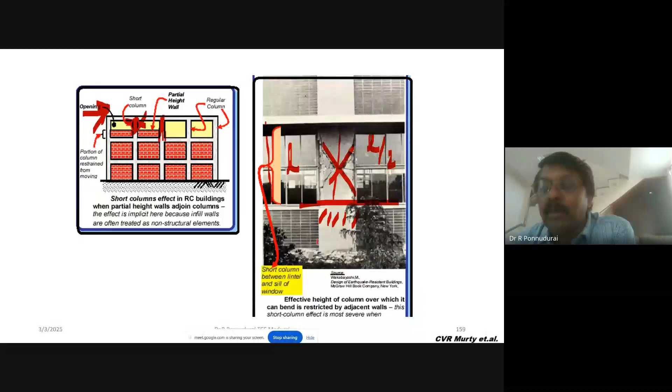So either you have to fill this infill panel all along the height of the building, or don't provide any infill panel. Partial infill should not be there. Only glass panel or a fully covered infill panel. So partial infill should be avoided. Is it clear now? I suppose it's clear to you. Okay. So these are the failure of short columns.

So what we can do is we can go for confinement of stirrups. Wherever it is suspected, suppose this is a short column, here just go for a closer spacing of the stirrups in this region. So that is the solution here. We'll have to go for confinement of stirrups all along the height of the building. So that is the solution suggested.

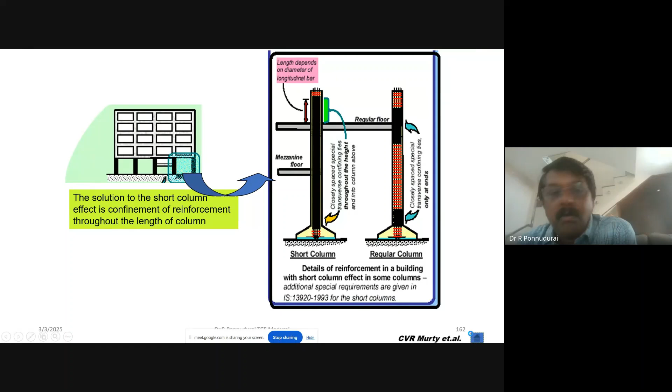Is it clear now so far? Anything you want to discuss? Yes, sir.

Okay, next we will go for a column beam joint. The column beam joint is very much important because the area in this region is very small. Smaller area, column beam joint. If we take a square portion, suppose, now when the earthquake forces are expected to act here, what happens is this square becomes a rhombus.

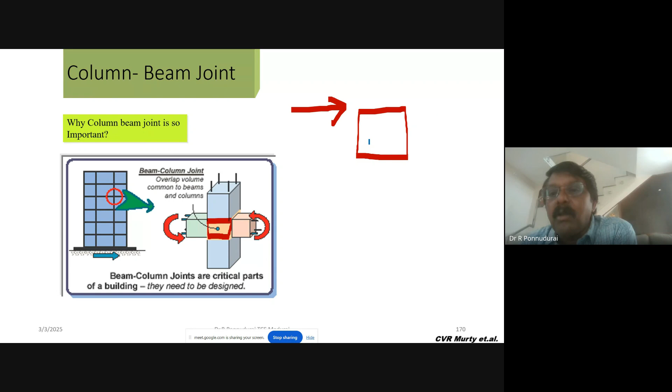We agree or not? Yes or no? Okay, the square portion is expected to get distorted. It becomes a rhombus. That means this diagonal is getting increased, this diagonal is getting decreased. So the increasing diagonal is the reason for the failure.

Suppose your concrete is weak in taking tension. So the X crack will be developed here, all along the joint, the diagonal joint. But this diagonal is okay. Why? Because the concrete is taking compression, there won't be crack formation in this diagonal.

But the very next second, the forces are reversed. This length of the diagonal is getting increased. So we are going to have the X diagonal crack here. And that is for only one cycle; just imagine n number of cycles. So that means the diagonal.

Hello. Is it okay? It's clear? Yes, sir. Okay. I suppose the time is over. Only 11 o'clock. Okay. Any doubt you want to discuss now?

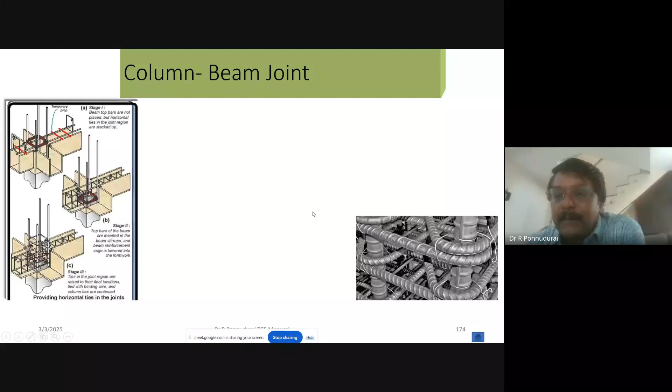So far we discussed the reason for earthquakes and how we measure earthquakes by qualitative and quantitative magnitude and intensity. And we discussed load path, soft story and weak story, shear wall, short column damage, twisting of the building. So far we discussed the potential deficiencies that exist in RC buildings in our society.

Okay. Anything you want to discuss? Any doubt so far?